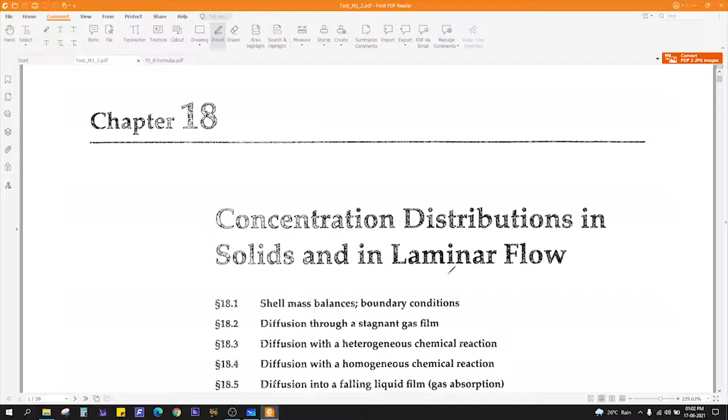Today we're going to discuss the shell mass balances and some problems using shell mass balances. As discussed earlier, the shell mass balance approach is the same as before: take a thin shell, do a mass rate balance, derive the flux profile, put Fick's law in the flux, and then get the concentration profile. So the steps are same.

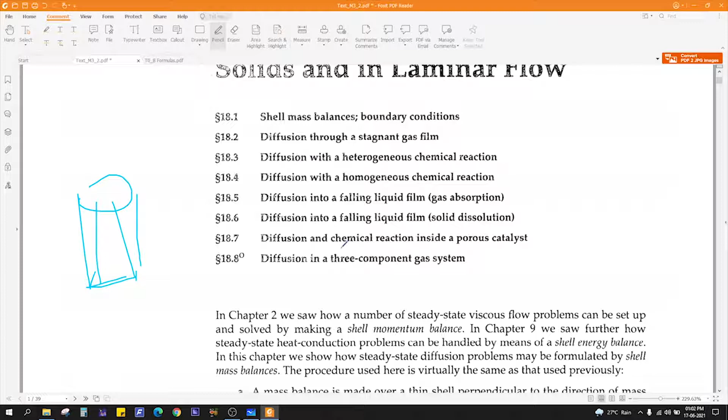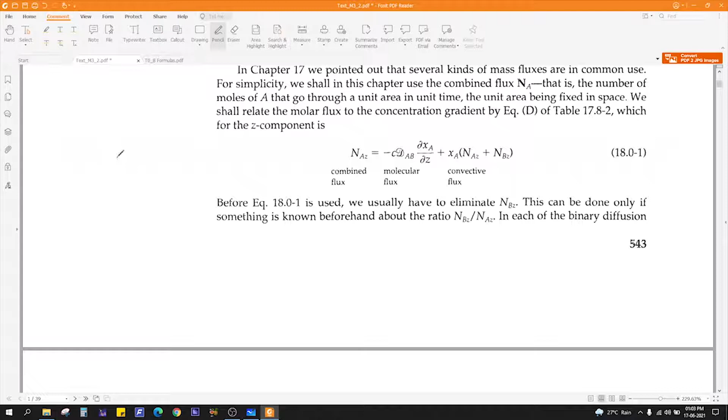So now you know the combined flux, represented by capital N, as discussed in the previous lecture. Capital N means it is the molar flux. Let's solve all the problems in molar flux only, so ignore the mass flux units. From now onwards, let's use the molar flux units.

So capital NAZ - we are mainly talking about binary diffusion, only binary diffusion. So we have two species A and B. I want to calculate the total flux of species A, capital NA in the Z direction. You can write X, Y, or Z, but for simplicity it is given as Z direction, so the mass flux is happening in the direction of Z. If it is happening in the Y direction, you just simply write Y instead of Z.

So this is given as: the first term was molecular diffusion, that is given by JA, given by Fick's law. It is nothing but JAZ, molecular flux in the direction of Z of species A, and convective flux. So it is given as mole fraction of species A into total, total molar flux, convective molar flux N.

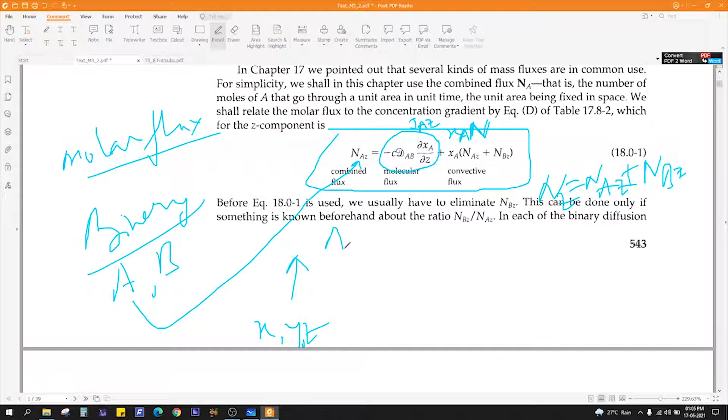If you want to calculate for species B, you can write the same thing: NBZ equal to minus the total concentration DBA - and I already told you DBA is equal to DAB only - times dXB by dZ, plus molar fraction of B into total convective flux, that is NAZ plus NBZ. So this is the definition, remember this.

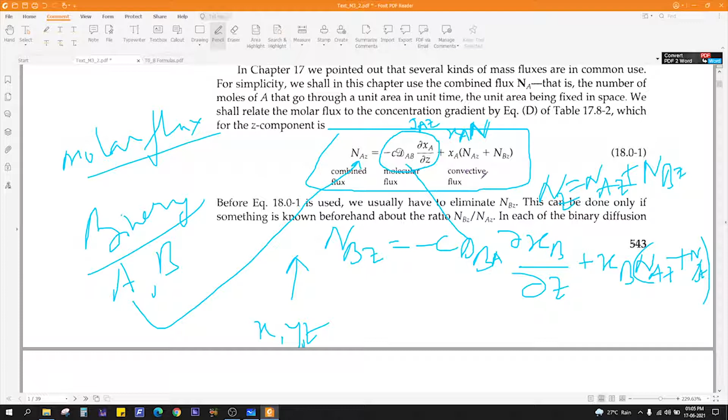So XA is nothing but mole fraction. We can also have homogeneous reaction and heterogeneous reaction. So what happens if a reaction is going on? If A is reacting to form B and you want to calculate the flux of A, then definitely A is getting depleted.

So you have to subtract from the mass conservation equation. And if you are doing it for B, it is getting produced by the reaction, so you have to add plus. If it is the reactant, you are calculating the flux for the reactant, then you have to subtract minus consumption, whatever. And if it is getting generated, as in case of the product, you have to write plus.

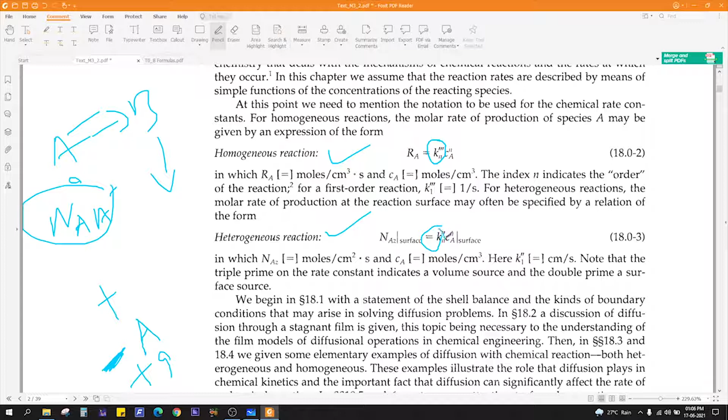K triple dash is per unit volume, and K double dash means the surface area is taken into account. So the form for shell mass balance is same as before: in minus out plus generation or consumption. If you have generation, you add plus, if you have consumption, you minus the consumption rate. So: rate of mass of A in, minus rate of mass of A out, plus production or minus consumption, equal to 0, because we are doing it at steady state. Remember this general shell mass balance equation - based on this only we will solve the problems.

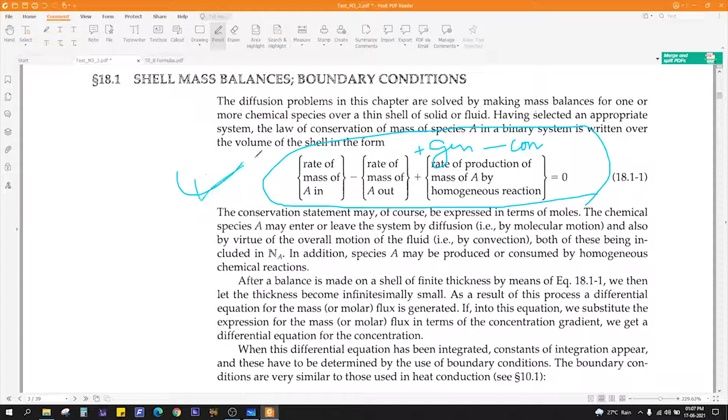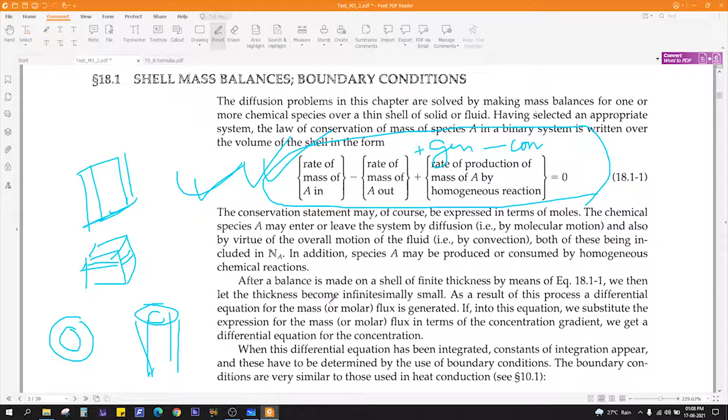So I will repeat the steps again. Take a thin shell according to the problem. If it is a rectangular slab kind of thing, then you have to take a rectangular thin shell. And if it is cylindrical, then you have to take a thin shell of cylindrical shape. And if it is a sphere, you have to take a thin shell of spherical shape. Everything is mass in, but you can also do it in terms of mole - it is the same thing.

Also the boundary conditions. Suppose at some point the concentration is given, so that is a boundary condition. Suppose at some point instead of concentration, the flux is given. That is also a boundary condition.

And lastly, like in heat transfer where you applied Newton's law of cooling at the surface, similarly using mass transfer coefficient you can apply this. Suppose here I have a liquid and it is evaporating, and here air is flowing, so definitely the air will take away the vapor, right? So you can use this equation, mass transfer coefficient, to calculate the flux at this point.

Also, suppose there is a catalyst and it is reacting at this surface, you can also use the surface reaction to find the boundary condition. So let's say some reaction is happening, you can write Na0 is equal to K, where K is the rate constant based on the surface, and Ca0. This is how it is calculated.

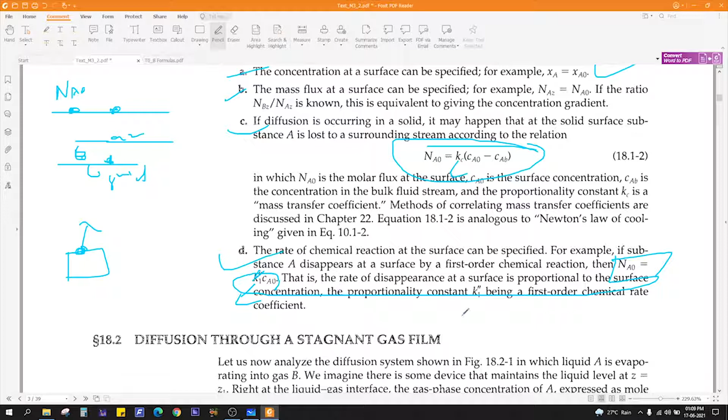Okay, let's solve a problem, you will get a clear idea. So our first problem is diffusion through a stagnant gas film.

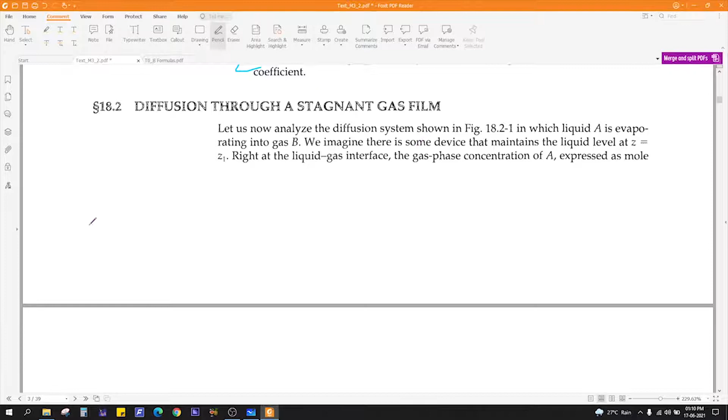So what is happening is I have a liquid A, and here I have, let's say, gas B, mainly the air, and this gas A is diffusing. Definitely it will diffuse because here there is high concentration of A, and here zero concentration of A. So from high concentration to lower concentration, there will be a mass transfer.

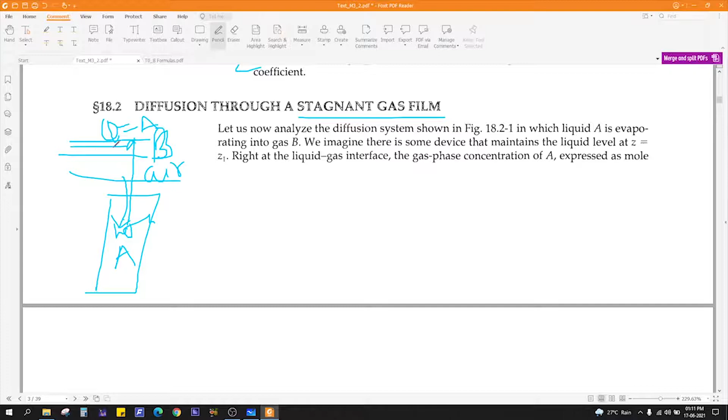Okay, and stagnant gas film. Stagnant gas film means, B should diffuse here as well, but if the air is flowing in this direction, it will not have enough time to diffuse in this direction. The air cannot diffuse in this direction if it is flowing. So only A is diffusing in this direction and B is not diffusing. So this is the case.

So air is flowing, this is called diffusion through a stagnant gas film. The air is stagnant, it will not diffuse in this direction, only A will diffuse. So diffusion through a stagnant gas, or also called A diffusing in non-diffusing B.

Because the air cannot diffuse, it is moving with high velocity, right? So it will simply move on, it does not have enough time to diffuse here. So you can say non-diffusing B, and A is only diffusing here. So you say A is diffusing, or diffusion through a stagnant gas film. Okay, so this is the problem.

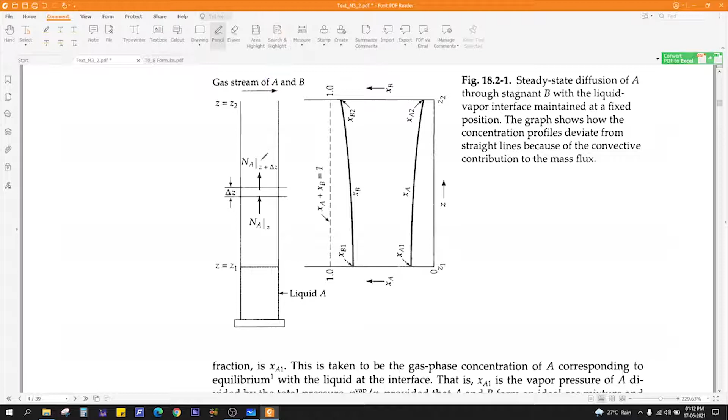So I have a liquid column A. Because of vapor pressure difference, it will evaporate, right? So it will try to diffuse in this direction, and here a gas stream is flowing and it will take away this vapor.

So here it will be A and B, because if the concentration of A is not zero here, then definitely it will be a mixture of A and B. So A and B are moving here, but here there is a high concentration of A, so mass transfer will take place in this direction. So you are required to find the concentration profile of A, how it will vary with distance.

So how to proceed: this is some kind of tube, let's say, or it can be of cylindrical shape, it doesn't matter. In this problem, the surface cross sectional area is given as S. So you just consider this thickness, you have to take a thin shell, right?

So since the direction of mass transfer is in the Z direction, the coordinate system is like this, 0 and Z. So mass transfer is happening in the Z direction, so I will take a thin shell normal to this direction. This is the thickness delta Z.

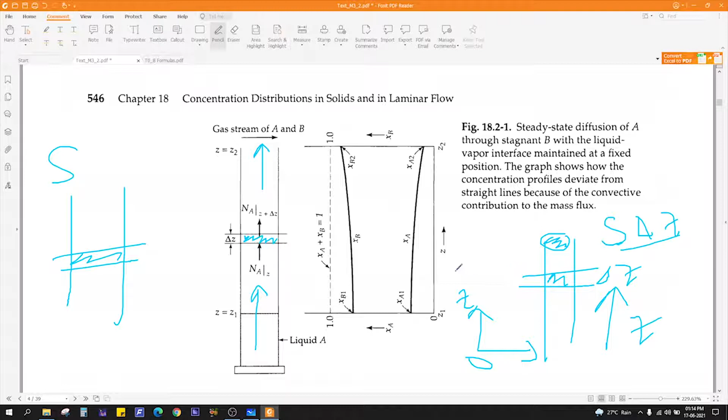So we'll do the balance now, right? We have taken a thin shell at distance Z. If my origin is here, this point's distance is Z. If the shell thickness is delta Z, then this point is Z plus delta Z. So this is the in point, this is the out point.

And we'll integrate over the whole, from Z1 to Z2. Why Z1 to Z2? Because liquid is filled up to this point, and here, because of pressure differences, the liquid will vaporize, and this vapor will get transferred in this direction. So I have to integrate from Z1 to Z2. First I will do the balance: in minus out plus generation minus consumption equals zero, at steady state.

Since NA is the mass flux, but we are calculating the mass rate, we have to multiply by the area, S, the cross-sectional area. So 'in' is the molar flux of A in the Z direction at point Z. What is 'out'? Area into NAZ at point Z plus delta Z. And there is no generation, so this is directly equal to 0.

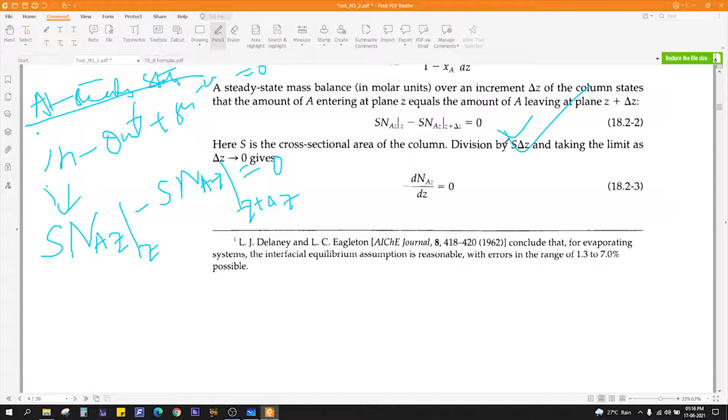We have got this equation. Now rearrange this and take the limits. Before that, just rearrange it. Divide S on the right hand side, so you will get only NAZ at Z minus NAZ at Z plus delta Z equal to 0.

Divide both sides by delta Z and take the limit as delta Z tends to 0, considering a very thin thickness. This is the definition of the derivative: NAZ at Z plus delta Z minus NAZ at Z, divided by delta Z, is dNAZ by dZ. So you'll have a minus sign here, and you get this result.

Now if you integrate this, what do you get? NAZ turns out to be nothing but a constant. So NAZ you can write directly as NA naught, some constant value. This means the flux is constant throughout all points, it is not changing. The total flux is not changing with distance in the Z direction.

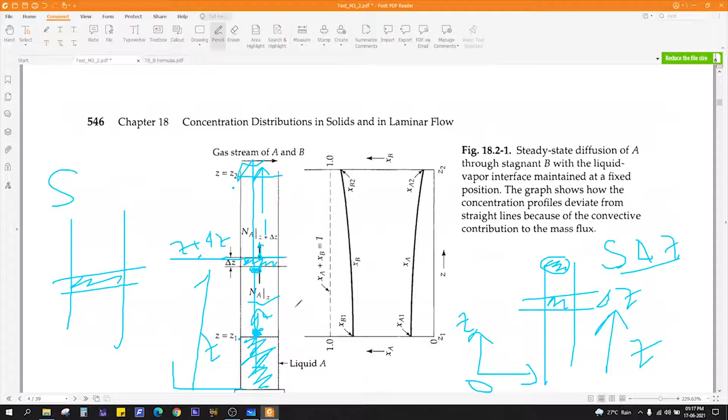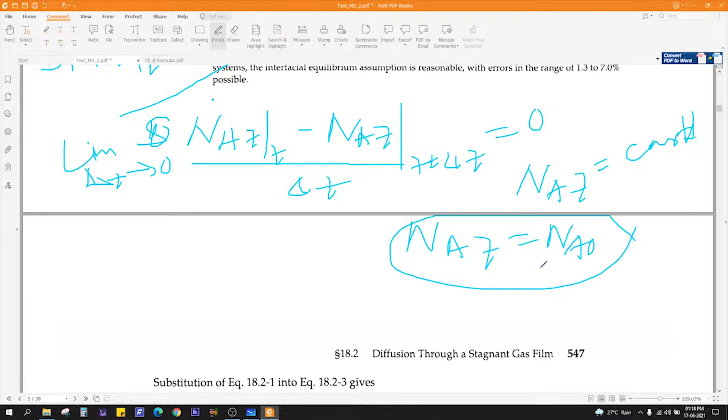Now to get the concentration profile, you have to use Fick's law. What was the formula for NAZ? This was the formula for NAZ. In this problem, A was diffusing and B was non-diffusing, so the convective flux of B is 0 since it is not diffusing in the Z direction. So you have got only this term.

So if you rearrange, only XA and Z will be there. If you put it on this side, you'll get 1 minus XA common. So you'll get 1 minus XA into NAZ and the molecular diffusion term. You have to shift it to the right side, then you'll get this.

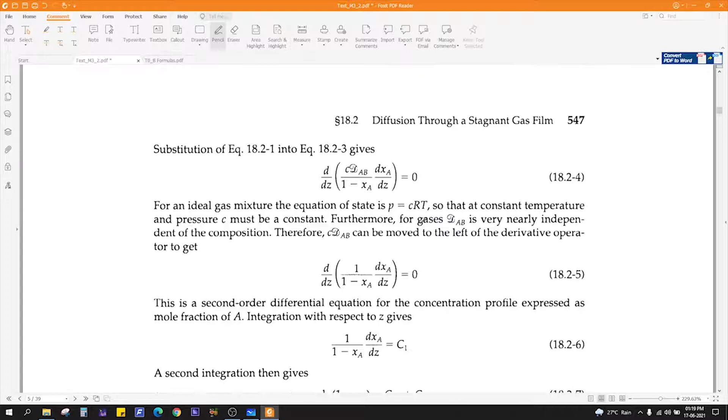So it is saying NBZ is 0 because B is stationary, no convective flux of B. Once you get this, you can put it into here — you can directly do it here too, no problem. If you put it here, what do you get? Now you can see this term.

DAB is constant since it's binary molecular diffusion, DAB is not a function of distance, so you can easily take it out. Again, the total concentration is not a function of distance, it will always be the same, so you can take it out and shift it to the right side, and it becomes 0. So finally you'll get this.

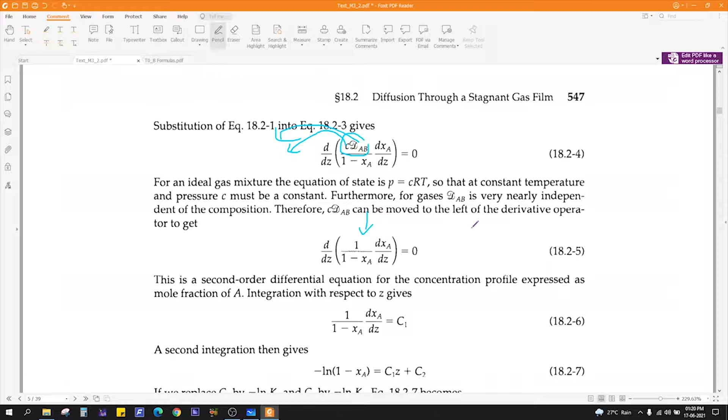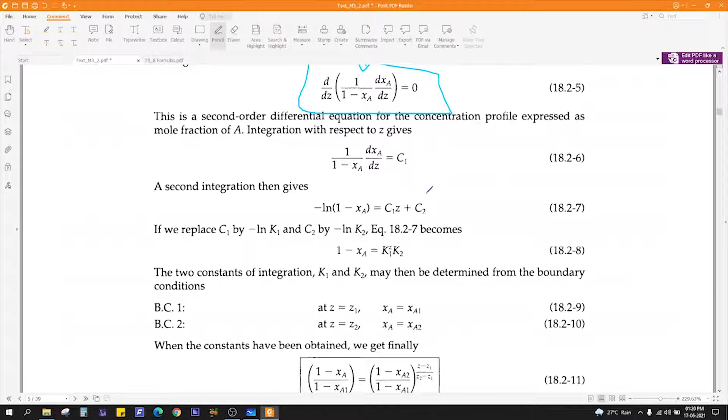Now take the first integration, and you'll get this constant C1. Then take the second integration, and you'll get this one.

Now, C1 is a constant, it can be anything, so just replace C1 for simplification. It will make the simplification easier if you use C1 in terms of ln — so I can write ln K1 instead of C1, and ln K2 instead of C2. If it is this one, then you can rewrite it like this.

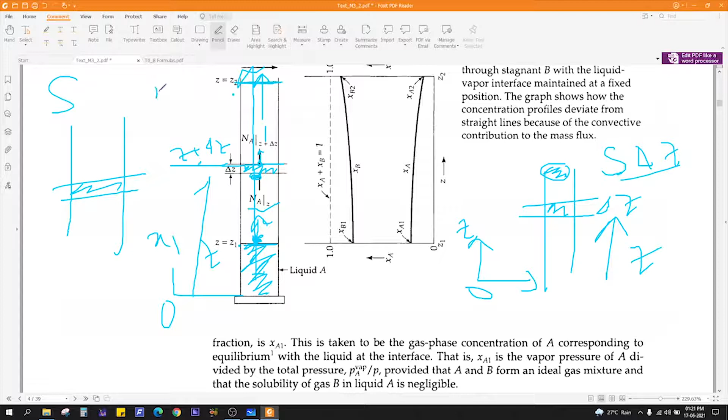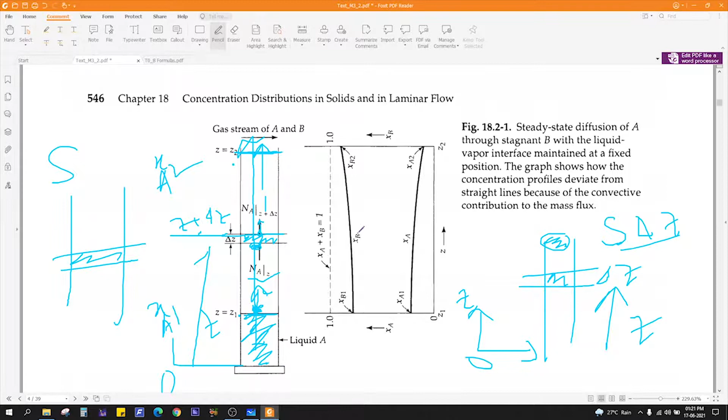Now you have to use boundary conditions to calculate the constants K1 and K2. You already know at Z equal to Z1, at this point, the concentration is molar fraction XA1. What is the molar fraction at Z2? This is X2 — I mean XA2, since it's the molar fraction of A at points 1 and 2.

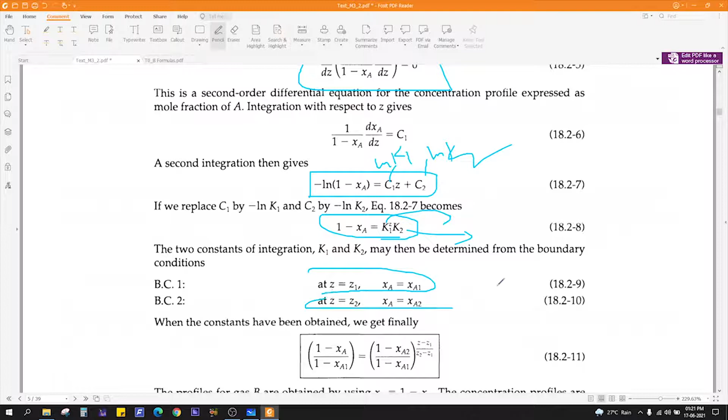So if you put that, this is the boundary condition. If you put both boundary conditions, you will easily get the constants K1 and K2. So if you rearrange, you will get this form, and this is the profile.

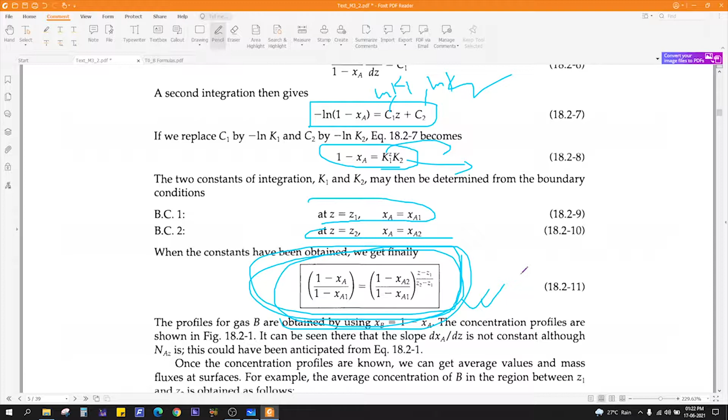If you want to calculate the molar fraction distribution or concentration profile of species B, you just use this: total mole fraction is always 1, so XA plus XB equals 1 at point 1, meaning XA1 plus XB1 will be 1, and at point 2, XA2 plus XB2 will be 1. If you use these relations and put them here, you can also find the profile for B. So this is how you find the profile.

Also, what is the mole fraction? Since it was a liquid, at this point, what will be the mole fraction? We generally calculate it using vapor pressure.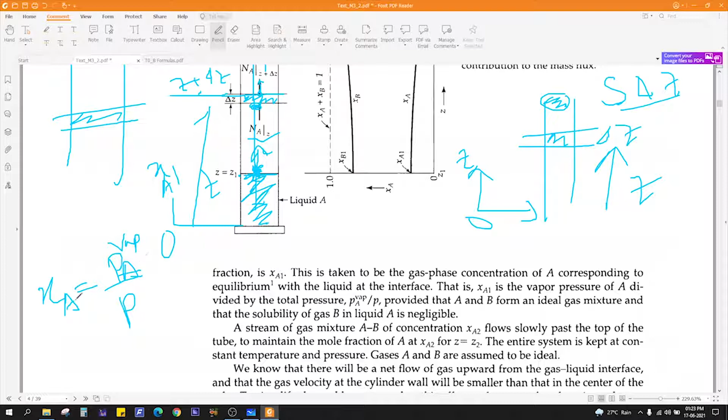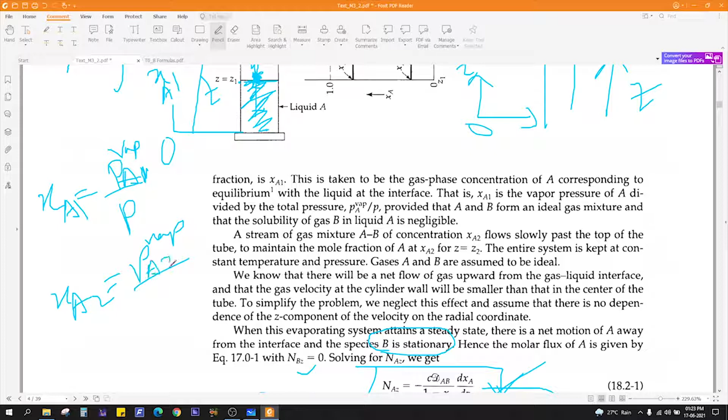What is the total pressure, P? And what is the vapor pressure of the liquid A at this point, PA? So XA can be calculated like this. If you find out the vapor pressure at this point, you'll get the mole fraction at 1 for A as vapor pressure of A at 1 divided by total pressure. Again at 2 you can calculate the mole fraction by vapor pressure of A at 2 by total pressure. This is how you calculate the mole fraction.

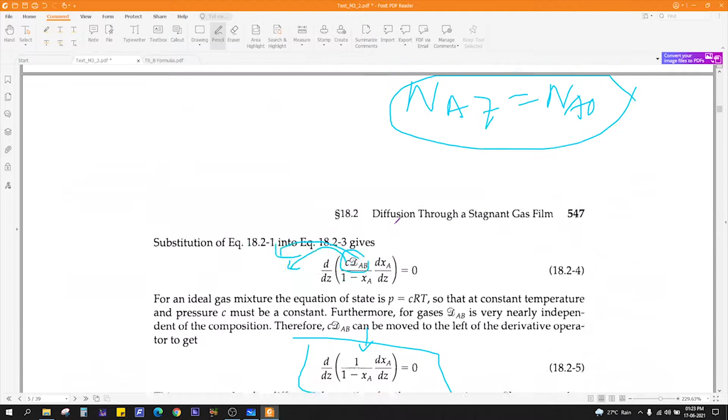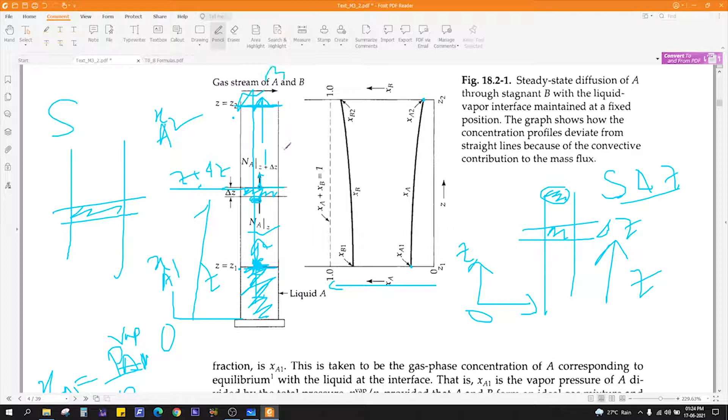So you have got the profile. If you try to plot this equation, so for A, this direction is the Z direction. From 0 to 1, you will get this. xA1 is highest at this point, Z1, and it is diffusing to a lesser concentration point, xa2. Similarly, this is for B, because if xa is 1, then xb is 0. The concentration of B was highest here and 0 here. So it is like this. This is how you use the shell mass balance to calculate the concentration profile.

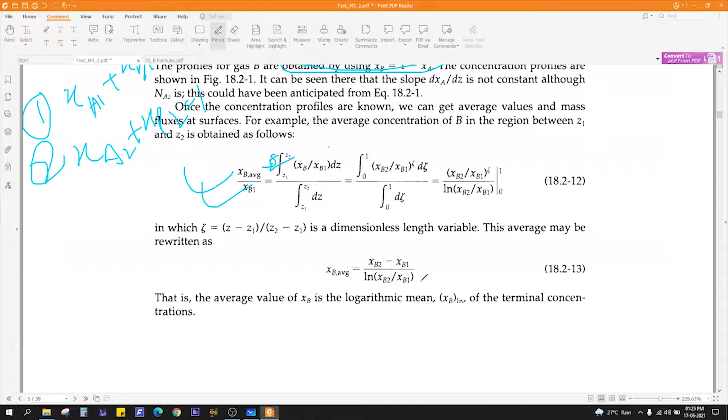You can calculate the average concentration like this. One more thing, logarithmic mean. What do you mean by logarithmic mean? Suppose I want the log mean of two quantities, like let's say I calculate the log mean area: A2 minus A1, divided by ln A2 by A1. This is your A log mean.

Similarly, if you say XB is the logarithmic mean average, then it is XB2 minus XB1 divided by ln XB2 by XB1.

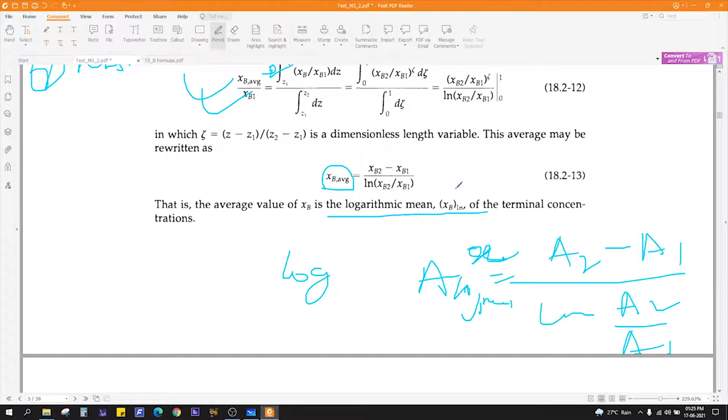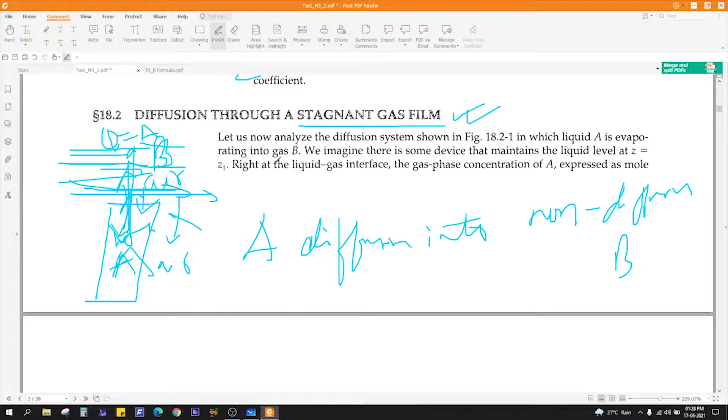Let's discuss the second problem. It is not given in this book, but you have already studied this in the mass transfer course. What if there is no stagnant gas film? The gas B will also diffuse in this direction. It is not flowing in this direction, but it is diffusing in this direction. A will diffuse in this direction and B will diffuse in this direction, because there is high concentration of B here and low B concentration there. So it will diffuse in this direction, and here there is high A concentration and here lower, so A will diffuse in that direction.

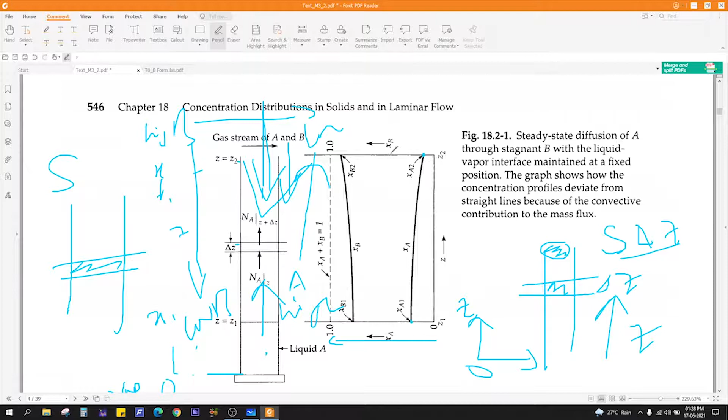So this is the case of equimolar counter diffusion. Equimolar counter diffusion means the molar flux of A and B are the same, and they are counter diffusing, though they are in opposite directions. B is diffusing in this direction, A is diffusing in this direction. So they both are diffusing in opposite directions, and the flux values are the same, with equimolar flux. So what will be the concentration profile or mole fraction profile in this case?

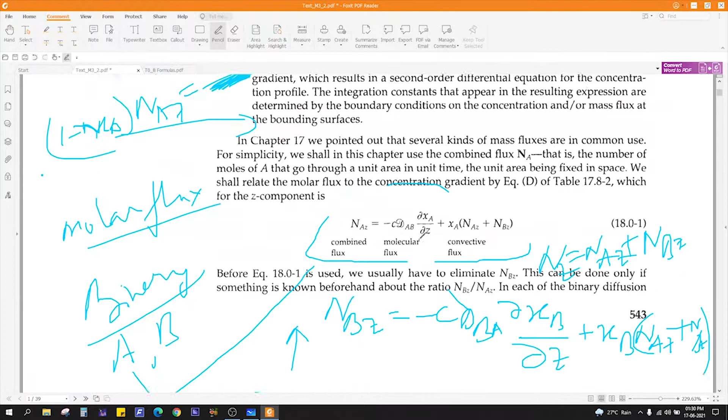We have to approach this problem in the same way. We take a thin cell like before. Only the difference is this will change, the definition of the combined flux will change. This was the formula for the combined flux. Now, equimolar means NAZ is equal to NBZ, but for counter diffusion, opposite direction, so it's minus, because in that problem we took positive Z in this direction, so NAZ is positive, but B is diffusing in this direction, so it has to be negative. So if this is true, then this term will become 0.

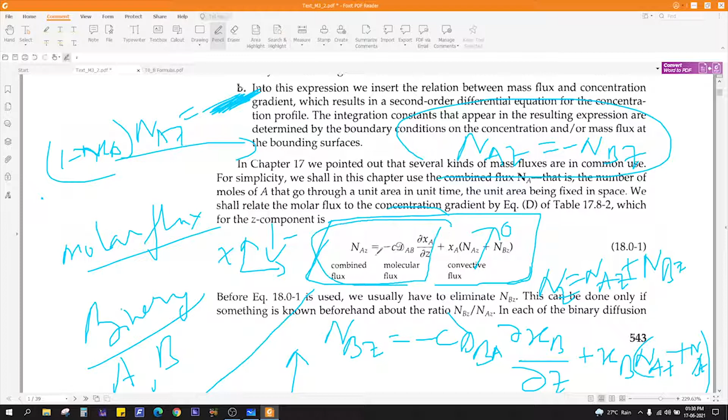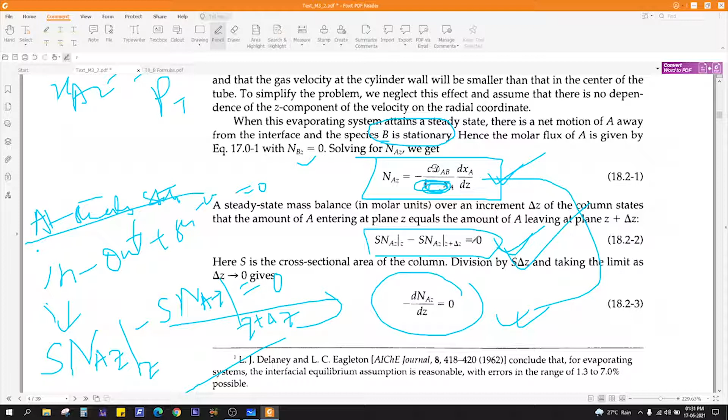So only you are left with this. Simply put this in that equation, we'll go through it again. So this term will not be here in the equimolar counter diffusion case. So NAZ is simply minus C DAB dXA by dZ. Take a thin cell, already taken a thin cell, do the in-out balance. There is no generation or consumption, so simply this. Take the limits as delta z tends to 0, you get this derivative.

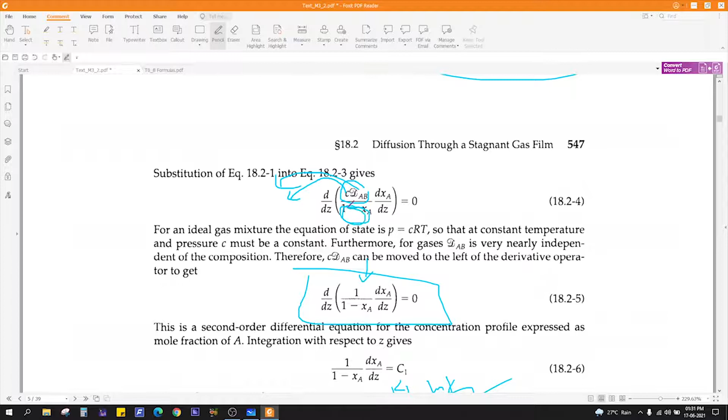Just simply put the definition of NAZ. This will not be here. CDAB is constant, just divide on the right hand side, so you will get this. So this will not be here, so you will get d square xa by dz square equal to 0.

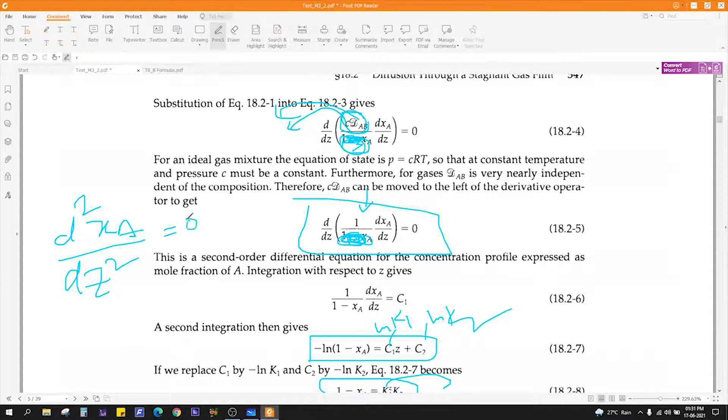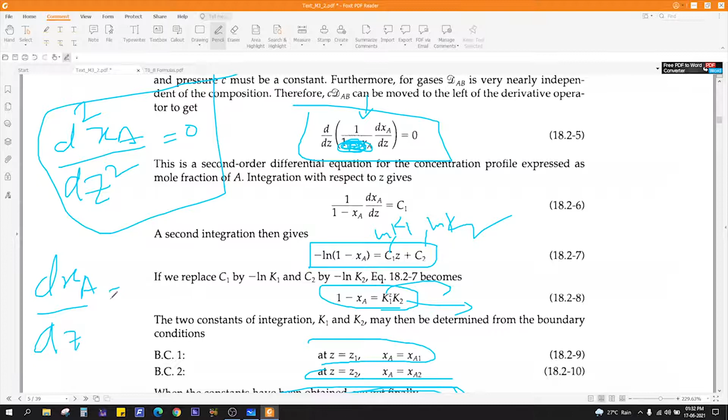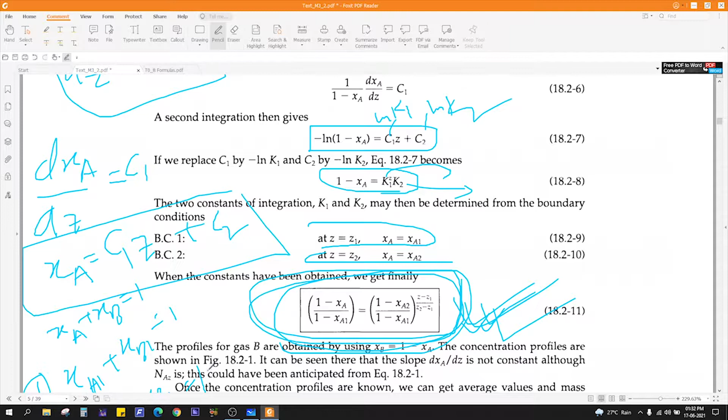This is the equation for equimolar counter diffusion. Just integrate twice. So if you integrate it, after first integration you will get dxa by dz equal to c1. Do a second integration, you will get xa is equal to c1z plus c2.

Now use the boundary conditions. At z equal to z1, xa equal to xa1, same as before. At z equal to z2, xa is equal to xa2. Put the first boundary condition here, you'll get xa1 equal to c1 z1 plus c2. Second, you'll get xa2 equal to c1 z2 plus c2. Solve for c1 and c2. What do you get?

So first subtract it. This is equation 1 and equation 2. First do 1 minus 2. You get xa1 minus xa2 equal to c1 times z1 minus z2.

So you have got the value of c1. c1 is nothing but xa1 minus xa2 by z1 minus z2, right? So you put the value of c1 in any of the equations, you will get the value of c2. So c2 will be xa1 minus c1 into z1, right? So xa1 minus xa1 minus xa2 by z1 minus z2 into z1.

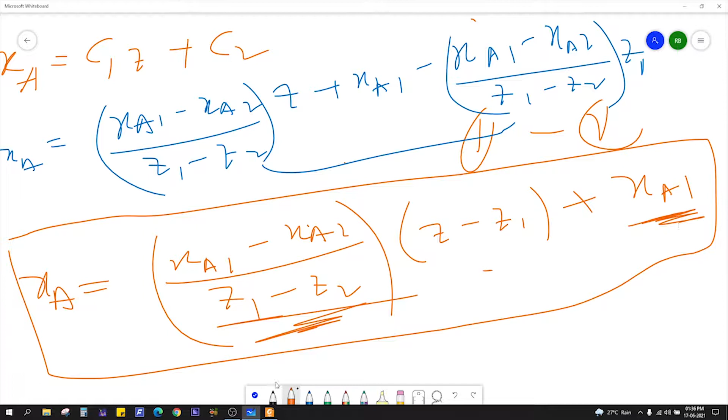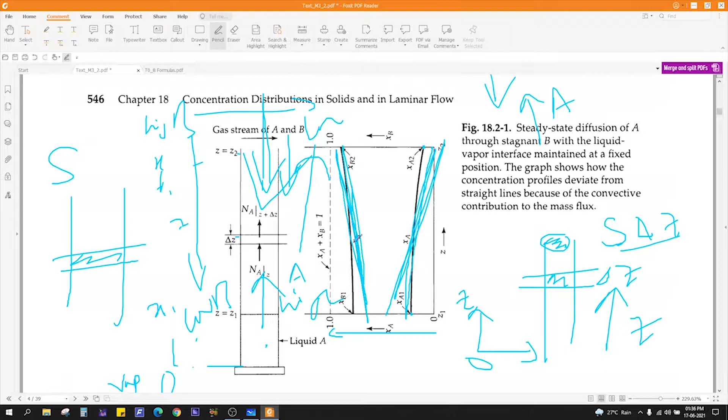So how will the profile look for this problem? So for this, it will be something like linear, a straight line like this. And for B, it will be like this, instead of this curve. Okay, so this is how you solve the problem using

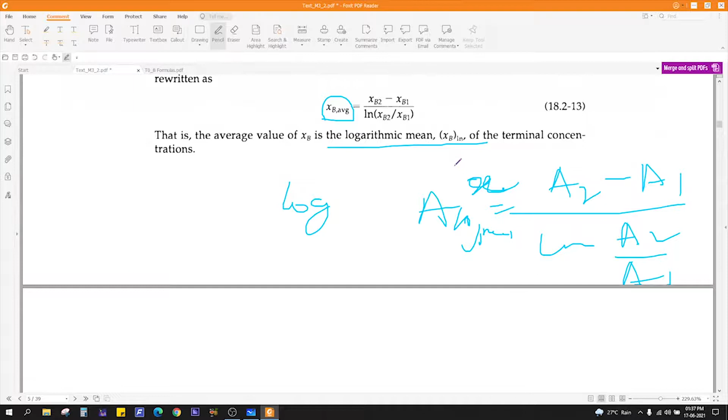shell mass balances. Okay, let's discuss the last problem, diffusion with a homogeneous chemical reaction. So we have this beaker, okay, here it is liquid B and here it is a gas. So gas will diffuse in the liquid B, okay. So here all the gas, so gas will try to diffuse at this point, okay, and it will react with B, okay.

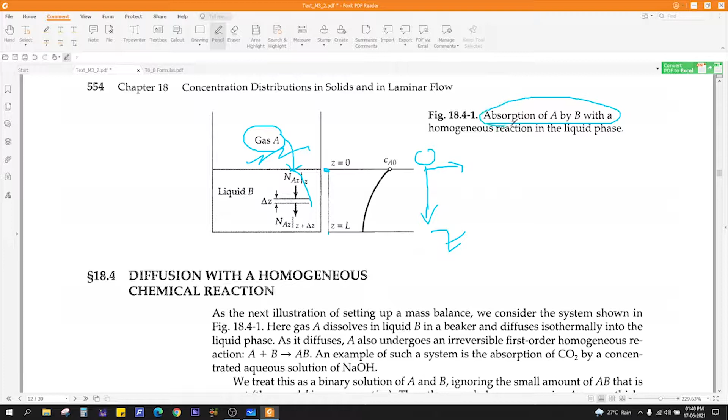So how will you do the shell mass balance? Okay, same as before. So first know the boundary conditions. So since our main species is A, the origin is taken here, and this is your Z direction. So this is your Z equal to 0 point, and this is Z equal to L point. So how will the concentration vary within the liquid B? Let's find out. So basically, this is absorption of A by B with some kind of reaction.

Okay, so we have A plus B giving AB. So it is assumed that this is a first order homogeneous reaction. B is in bulk, so the concentration of B is constant. So we assume that this is first order reaction. So the rate of reaction will be RA triple dash, because it's based on the volume. So it will be minus K1 triple dash Ca.

This is the rate of reaction. So this is pseudo first order reaction. As you can see, the molecularity is 2, but the concentration of B is high, so you can assume it is Cb naught, that is constant. So the rate of reaction should have been Ca times Cb, but concentration of B is very high, it's constant, Cb naught, so you can ignore this. So it is only a first order reaction.

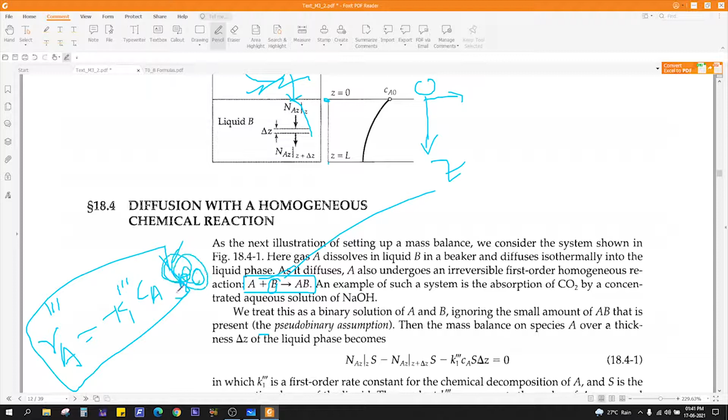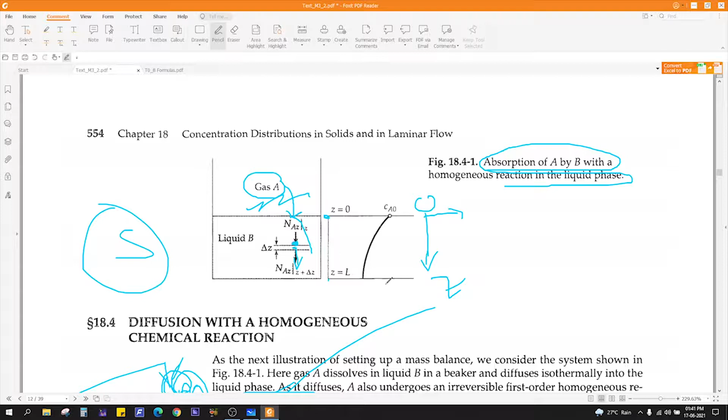Okay, so as before, take a thin shell balance. The cross-sectional area is given as S. So delta Z is the thin shell balance. So the in point will be down here at Z equal to Z, and out point will be here. And within this volume, there will be a reaction. Since A is reacting, that means it is a consumption, right? So you have to put a minus here.

It is not a product, so it is not getting generated. So if it is a product, then you should put plus, but if it is a reaction, you should put minus. So the thin shell balance is: in minus out plus consumption, where consumption is itself a minus, equal to 0. So what is the in?

Area into the mass flux, so NaZ, species A in Z direction at what point? At the Z point. Minus out, S into NaZ at Z plus delta Z. And remember, this is minus K1 Ca per unit volume.

So what is the volume of this shell? That is S into delta Z. So you have to multiply S into delta Z with this to get the mass rate, because this rate of reaction, if you're doing molar flux, is mole per unit volume per second. So you have to multiply by volume to get mole per second. Because you have multiplied area with the molar flux, you will get mole per second. So this has to be mole per second, so you have to multiply with the volume.

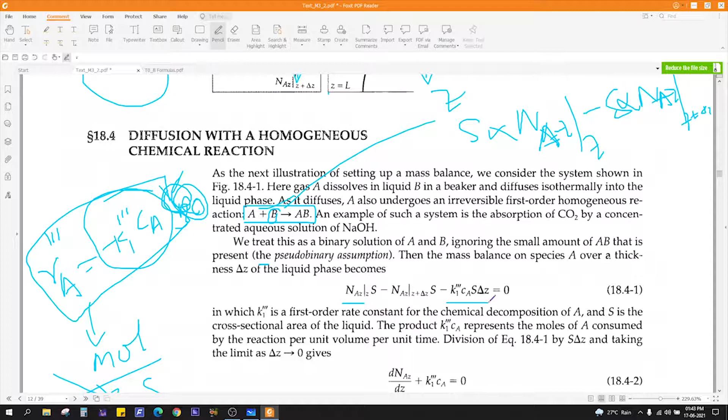So this is the volume, because S is the cross-sectional area. If you put this in, you'll get this equation. First, divide both sides by S delta Z. So S cancels out, only delta Z remains, and here you'll get K1 Ca equal to 0.

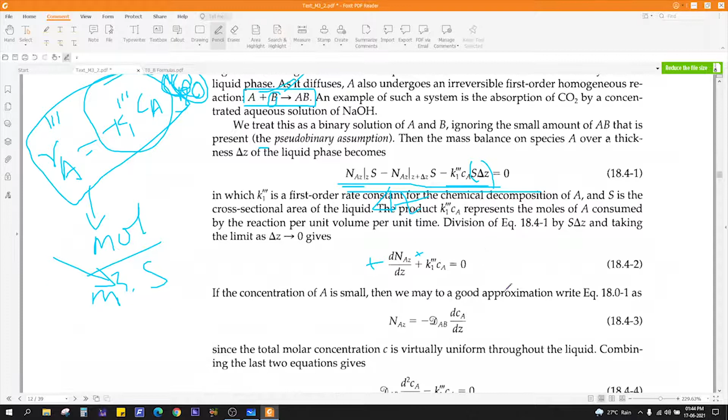Now if you take the limit as delta Z tends to 0, you get dNAZ by dZ. Shifting terms to the right hand side, you get plus plus only. So this is the first order differential equation. Now you have to solve it.

Before solving, you have to put in the definition of NAZ. Now you can see that A is diffusing, right? And you can also say that B is also diffusing in A, because if A is diffusing by relative motion, B is also diffusing.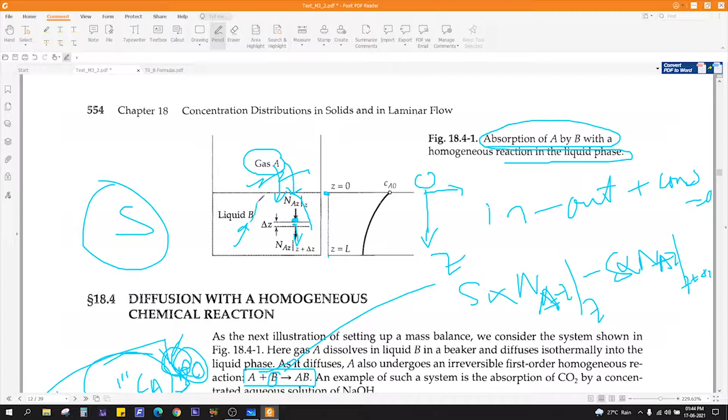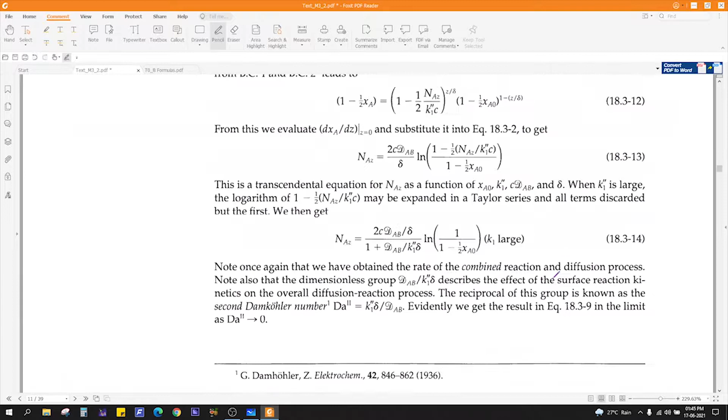So you have to use this equation from the earlier definition of NAZ, because you can see if NAZ is diffusing, then because of relative motion, B is also diffusing. So this term will become 0. So you're left only with this part, and you have to consider only this part.

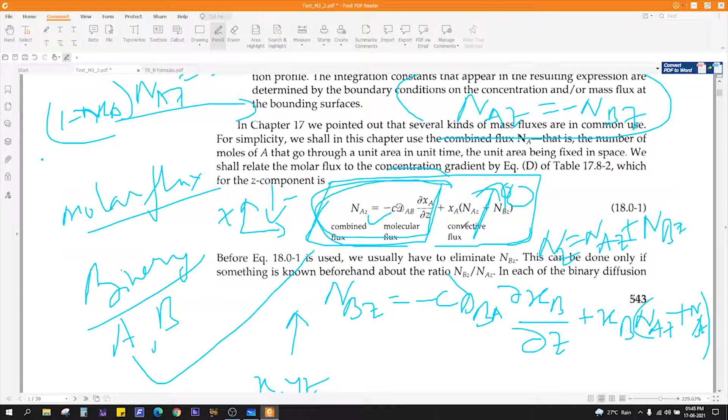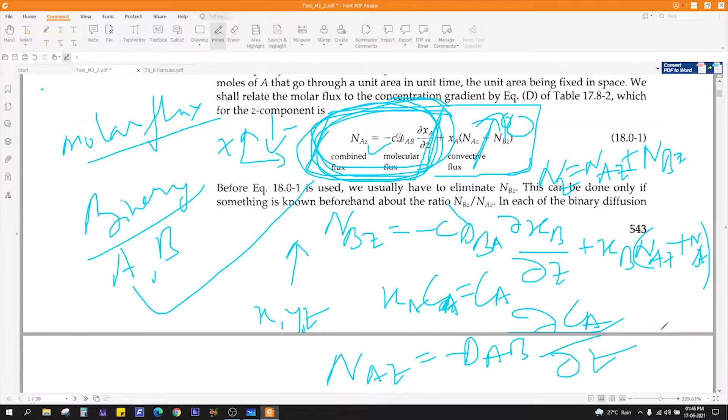This is nothing but, if you multiply the concentration to CA, XA into CA is nothing but CA. So you'll get NAZ equal to DAB, minus DAB into dCA by dZ. This is what you have got.

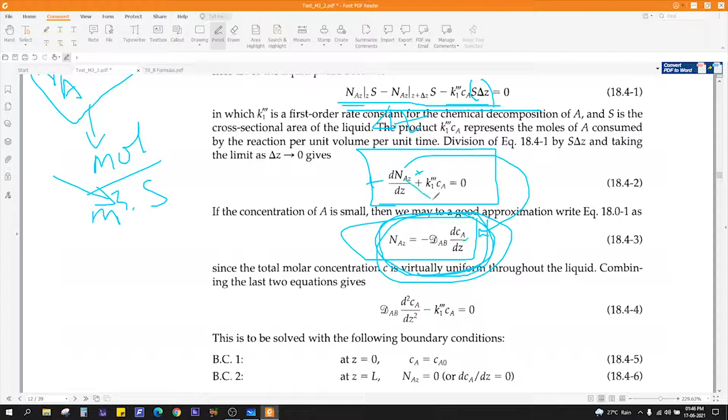Now you put this in place of NAZ, so you'll get this. So this is now a second order differential equation. Before solving this, let's make it in the form of this.

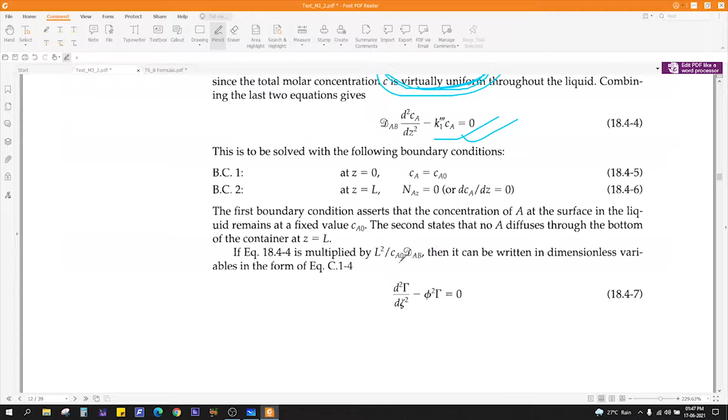I will try to make this equation in this form so that the solution is direct. So to transform it, we have to divide by DAB, making it dimensionless. If we multiply by L square and divide by CA naught by DAB, what will become?

CA by CA naught will become dimensionless, and DAB will cancel out. So it comes here, and you'll get something like this. This is your capital gamma, and this is zeta. So Z by L is dimensionless, and CA by CA naught is the gamma, dimensionless.

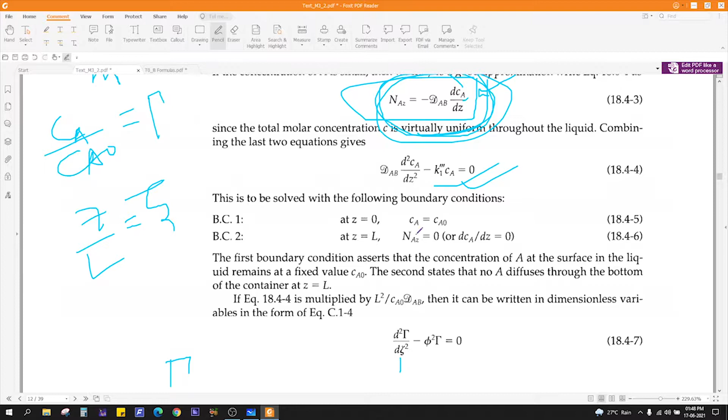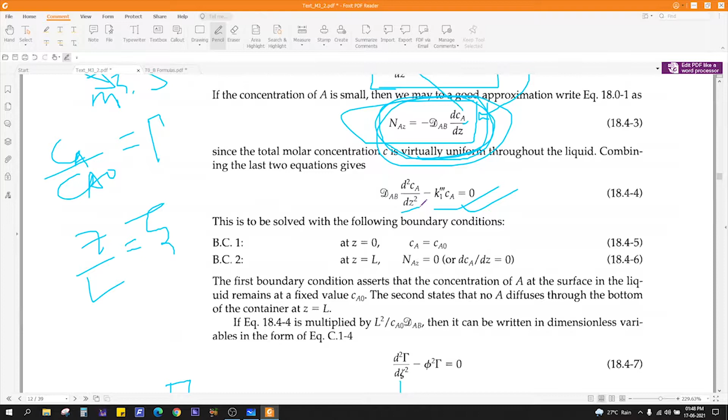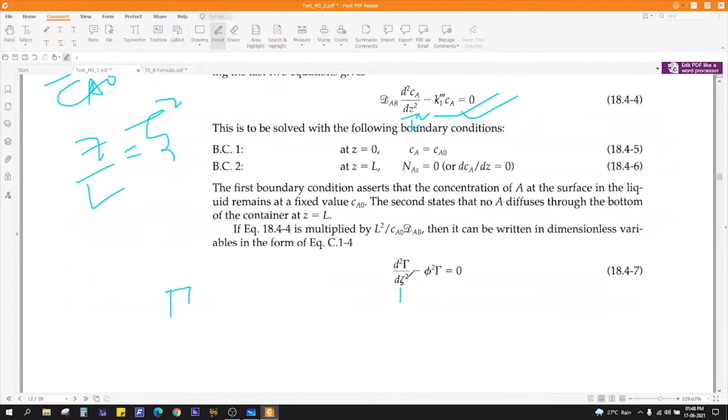And what is phi square? If you collect the terms, zeta is Z by L, and phi square is K triple dash 1 L square by DAB. You might ask why you multiplied by L square - because there you have dZ square, so you need L square to make it dimensionless, to make it zeta square.

So this is the form, now the same form as this one. So what will be the solution? Y will become equal to C1 cos hyperbolic A x, plus C2 sine hyperbolic A into x. So what will be the solution of this?

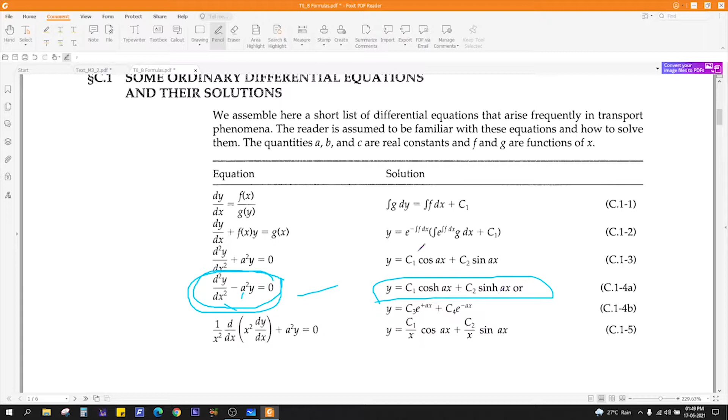So gamma will be equal to C1 cos hyperbolic phi zeta, plus C2 sine hyperbolic phi zeta. This is the solution. Just you have to apply the boundary conditions to get the final solution. So what is the boundary condition?

This was your original boundary condition. So you have to change these boundaries in terms of zeta and gamma. So at Z equal to 0, what is zeta? Zeta is nothing but Z by L, so 0 by L, so zeta is also 0. So CA is CA naught.

So what is your gamma? Gamma is nothing but CA by CA naught. So CA is CA naught, so gamma is 1. So this is the boundary condition: first, gamma equal to 1. At zeta equal to 0, gamma is equal to 1.

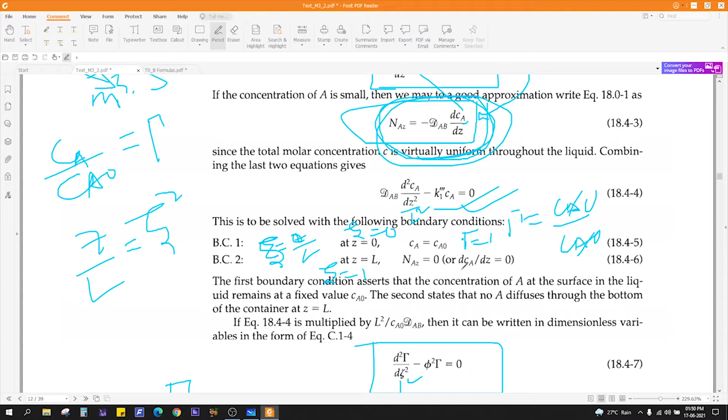Consider the second one. What is the definition of zeta? Z by L, so Z is L, L by L is 1. So at zeta equal to 1, either dCA by dZ equal to 0, or NAZ equal to 0 - this means flux is 0. So write dCA by dZ.

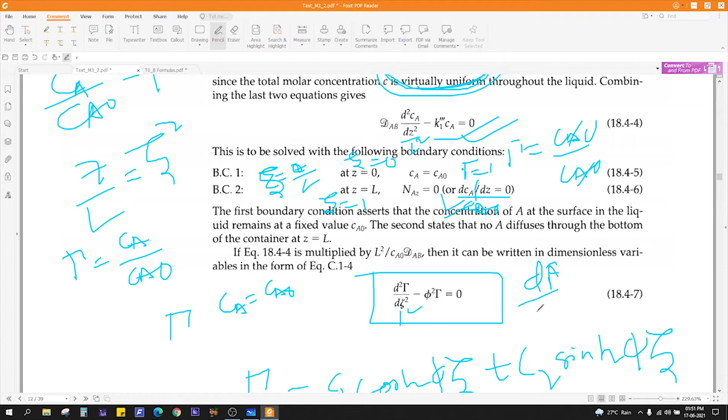So divide both sides by CA naught, L by CA naught, and you'll get d gamma by d zeta equal to 0. So you can use this to find C1 and C2.

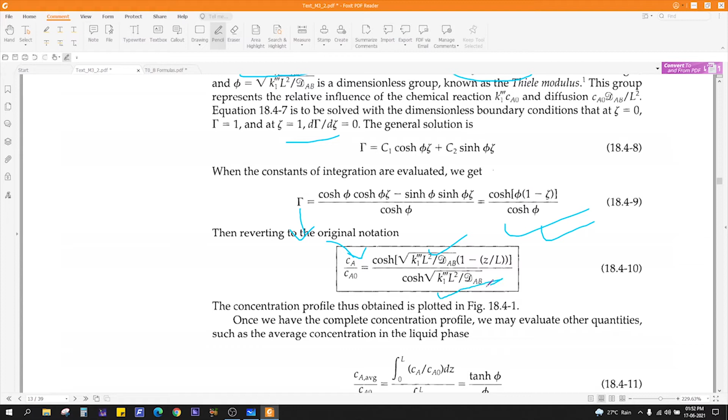So finally you'll get this equation. Now just re-substitute: gamma was nothing but CA by CA naught, phi was this, zeta was Z by L, and again cos H with phi. So this is your concentration profile of A.

So with this, we complete all the transfers - momentum transfer, heat transfer, and mass transfer. So from tomorrow onwards, I will discuss the question papers. Thank you.